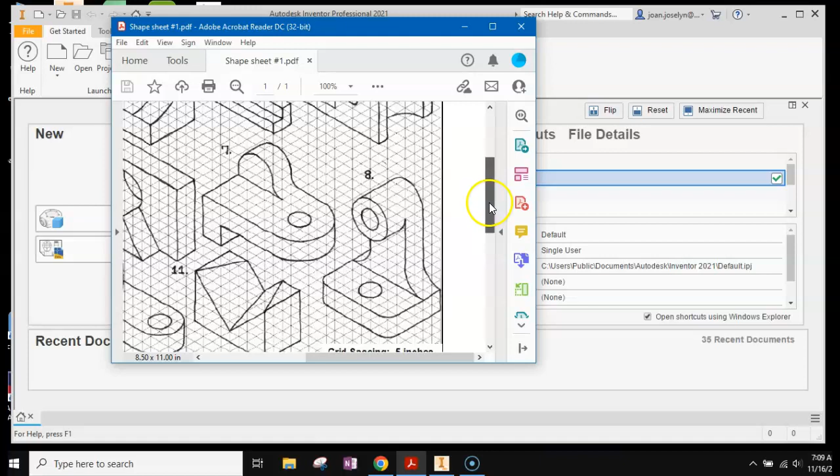Today we're going to look at shape sheet number 1 and shape number 8 right here. The grid spacing, as you can see, is 1/2 inch for every box. I think we'll start off with this base and then we'll build on top of it. So let's see, 1, 2, 3, 4, 5, 6 by 1, 2, 3, 4, 5, 6, 7, 8. 6 by 8. Let's start there.

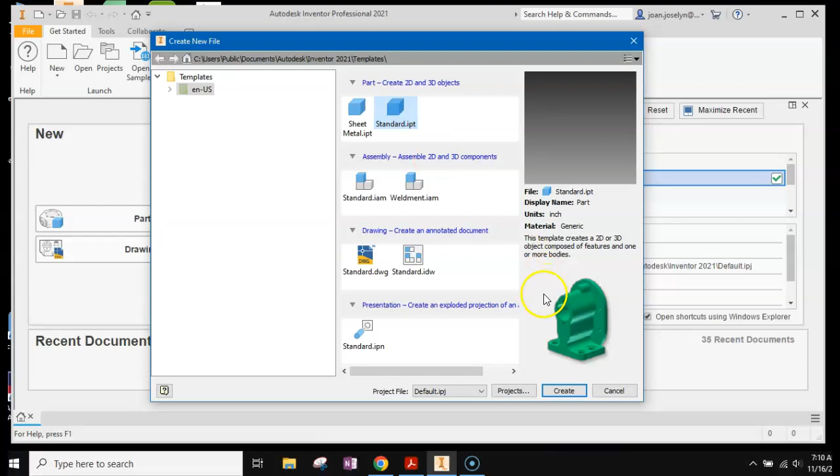All right, I'm using Autodesk Inventor and I'm going to do a new part. If you're coming from here, top where it says new, make sure you're not picking sheet metal. Pick standard, and then come down and hit create. IPT is a part file.

All right, so we're going to pick a new plane for this object. Come up to start new 2D sketch, and let's work on this like top type plane here. See this one here, XZ? Let's work on that. It's going to rotate it a little bit for you, but that's okay.

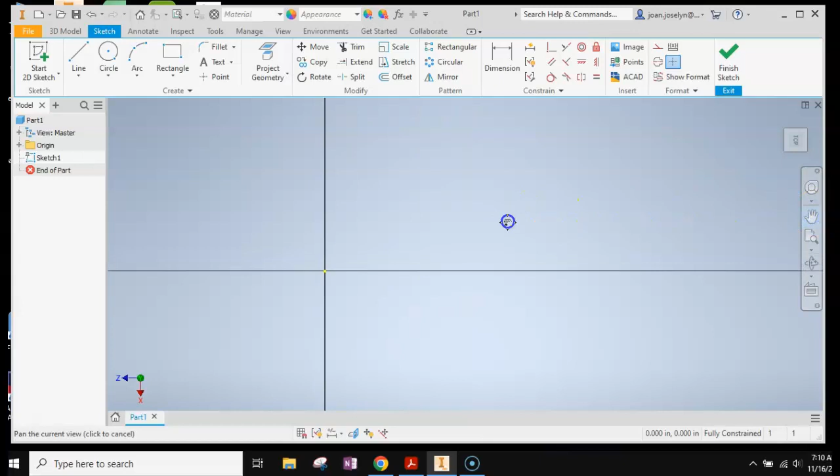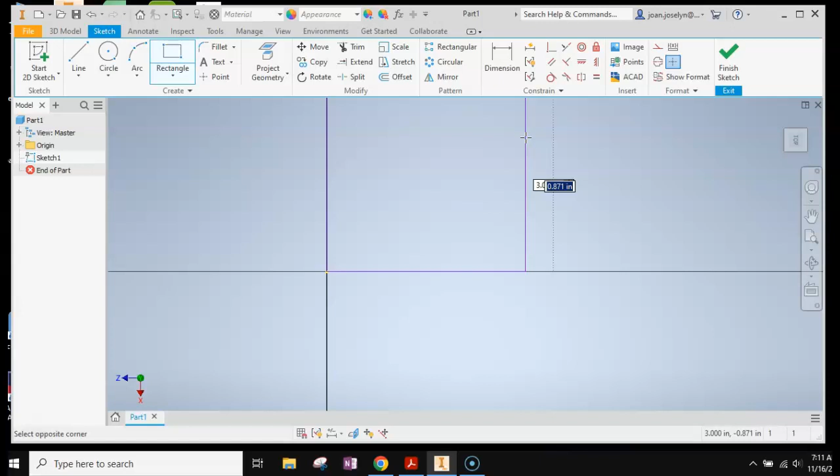Use my pan tool. Okay, we're going to take the rectangle tool. We'll go right on the origin, and we're going to drag to the right. Let's see if I can remember what I just said. The side here was 6 boxes, so that's 3 inches. If I hit tab on my keyboard, I can type in the top part, which was 8 boxes, or 4 inches. And then I'm just going to zoom out to, see if I can do this.

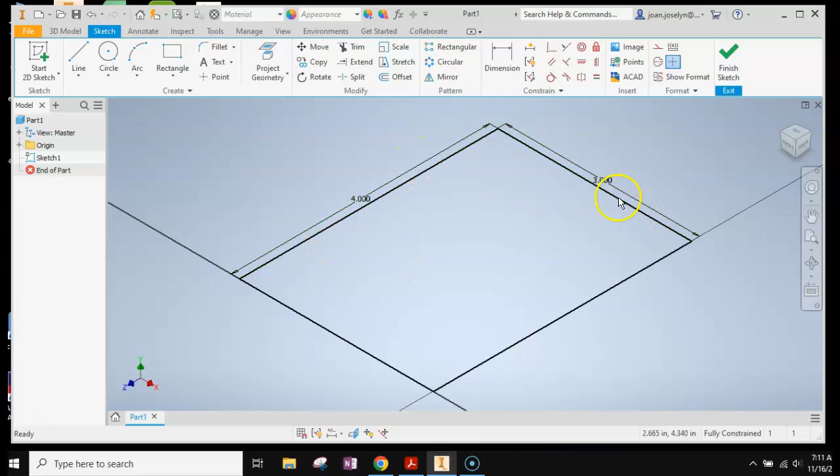I don't have a mouse. I'll hit the house button. Escape. Okay, that'll put it in front of me. I just hit the house so I can get it at 4 by 3, so 8 boxes by 6 boxes. Finish the sketch, hit that house, and then let's extrude it.

It looked like it was just 2 boxes going up, so 1 inch. So 1 inch it is, 2 boxes right there. Good job. All right, let's see what the front view is. Okay, I probably should have rotated this a little bit, but it's okay. We can work with it. Let me go this way.

Okay, so back in isometric, we're going to start building on the top here, and we'll see. So I'm going to be in the opposite direction of this picture, but it's all good. Let's see if we can build this part right on. No, let's do the curve while we're here. We'll do the curve and we'll do the circle. The curve looks like it goes in about 1/4 inch, and then we got the circle right in the center there. The hole we can add there.

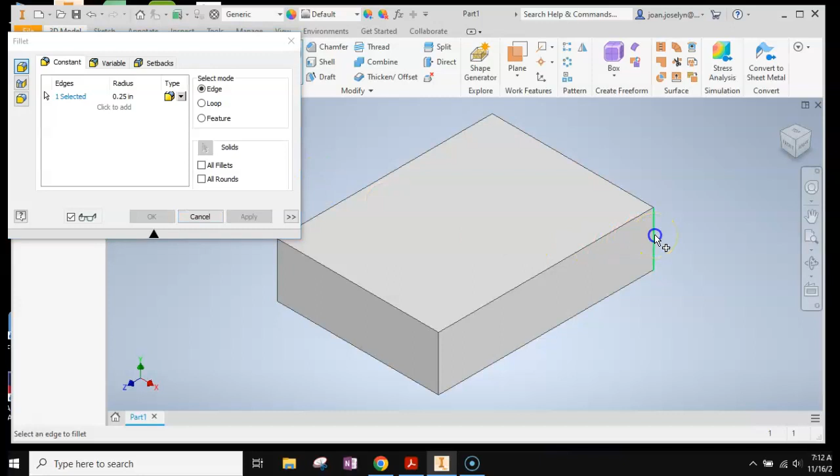Okay, so let's try the fillet tool. We do not need to be in a new sketch this time because we have a body we're going to do it on, and I think it looks like 0.25 inch, but we'll see. We're going to make sure we click on this corner and this corner. Yeah, there you go. And hit apply.

Looks a little thin compared to this picture. Let's take a look. No, because see, it goes halfway through a box. Yeah, that's about right. Okay, so now let's get this hole in here.

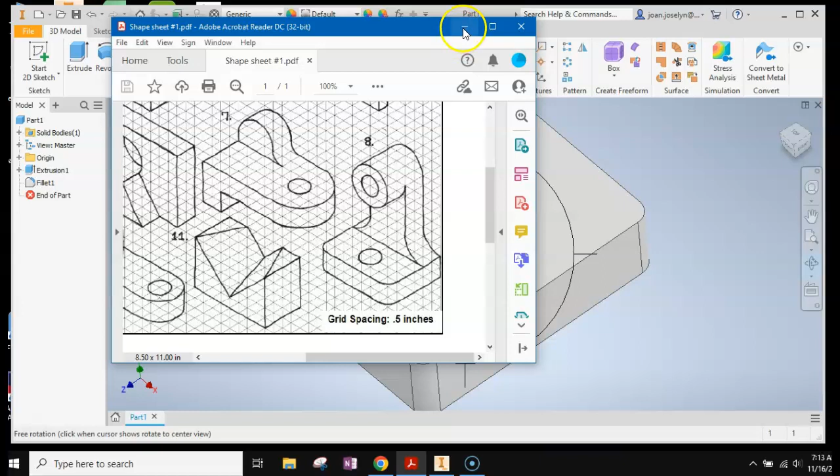It looks like it's, let's see, about 1 inch wide. Yeah, about 1 inch radius here. And then it is 1 inch away from this edge, and 1, 2, 3, 4 boxes, 2 inches away from the other edge. Okay, escape. Let's start a new sketch.

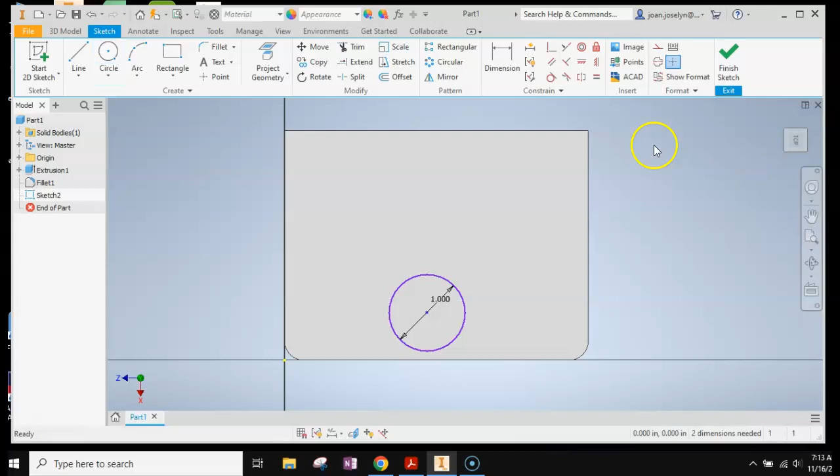Let's put it right on the top face. We're going to use the pan tool to move it over. Circle tool, we're just going to throw it anywhere. Call it 1 inch. You can also use a dimension tool to make it 1 inch. Hit escape on your keyboard. Now we're going to use the dimension tool to place it where we need it. Always start from the center of your circle, not the edge, but the center.

So click, left click center, left click bottom. I'm going to drag to the right a little bit so we can see it better. And I think we said it was 1 inch away from the edge.

Let me just double check that. Yeah, it's 2 boxes in. And then it was 2 inches from the side.

So dimension tool, center, grab one of the edges, left or right, doesn't matter. Just going to move it up so you can see it better and hit 2. Don't need to do the other side because it's a 4 inch square, so we're good. It's right in the center.

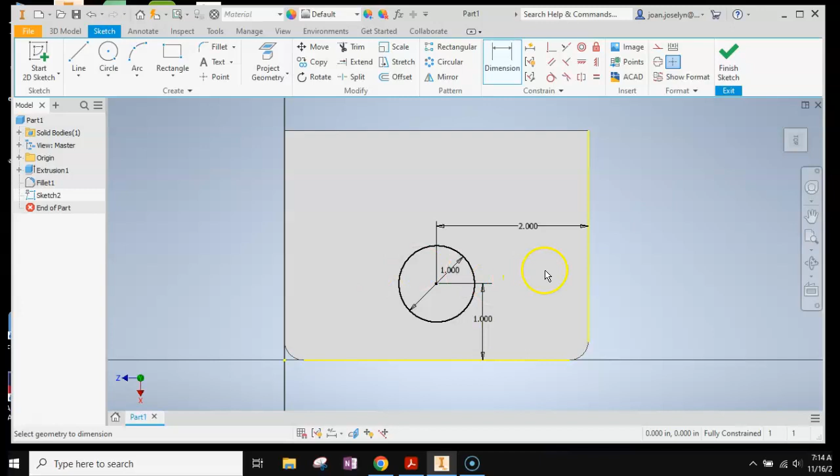Finish your sketch and then extrude. Hit extrude and drag this down all the way through, or hit cut in the Boolean options. Hit OK. There you go. That was pretty easy.

Okay, now for the back. We're gonna see if we can build this part. I'm just gonna build this center part. It's 1, 2, 3, 4 inches wide, and about 1, 2, 3, 4, 5, 6. Oh, that's a brain breaker, isn't it?

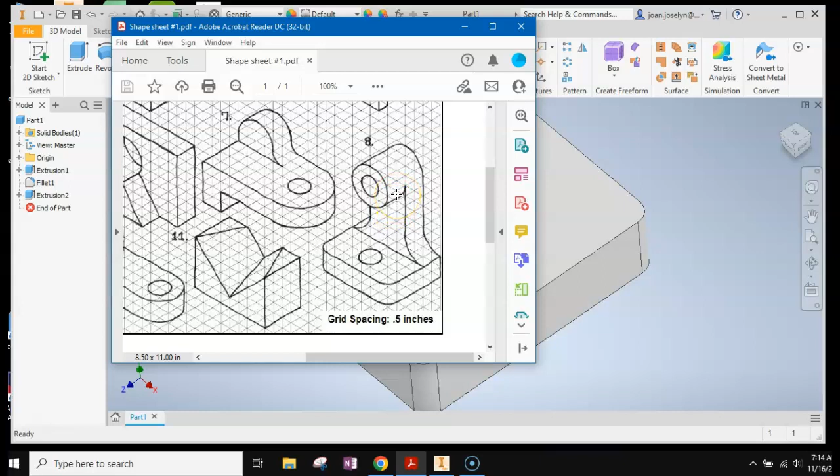Yeah, let me get a little closer. Okay, so 4 wide. That's 2 inches wide. 1, 2, 3, 4, 5. This is where I lose it. 6. I'm trying to get right into here.

1, 2, 3, 4, 5, 6. I think I'm going to go 7. Okay, so let's get this around the back.

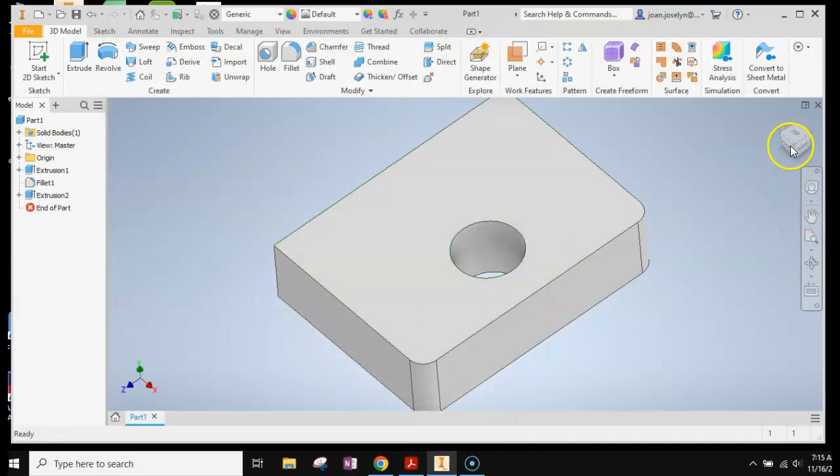You can use your view cube to drag it, or you can click through. I want the back of it. The arrows will help you. And then, okay, so it says, I don't think that's right though.

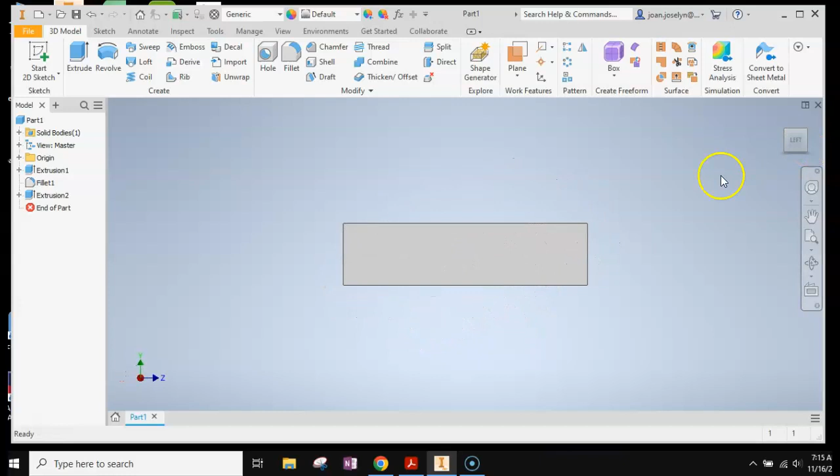Yeah, you have to look at it because it's how we set it up, right? So we're going to go, it's actually the left of it, which we know is the back of the object, but however I put it on the plane, that's how it's coming up.

Okay, so we want to work back here. See how there's no fillets? We're behind it. Okay, so we're going to do a new sketch right here.

And I know I need a rectangle tool. I'm going to go right on this line. It changed color when I got close. Make sure you see that.

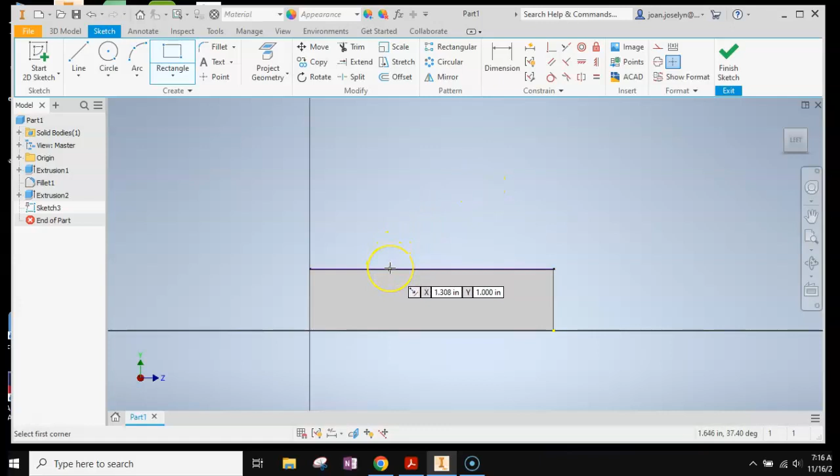Changes color. Going to pull it to the right a little bit. And I think I said it was 4. Hold on. 1, 2, 3, 4. We're going to ignore those curves.

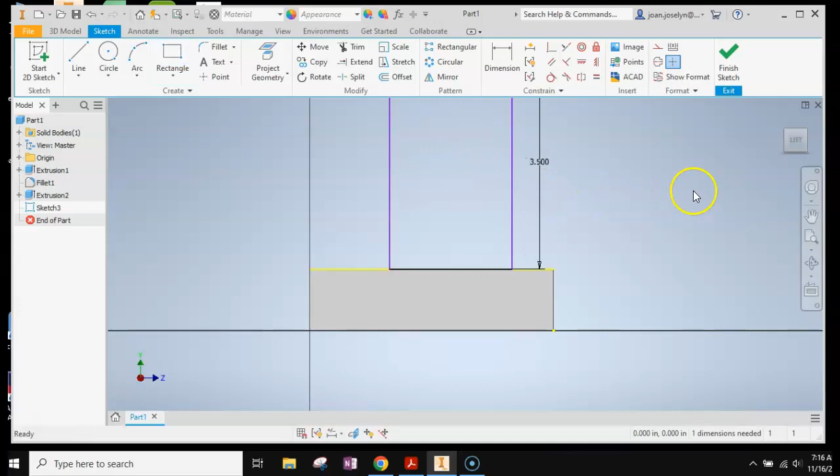We can do a fillet for that later. Okay, so 4, that means 2. And we decided the top was 7, so 3.5. I mean, feel free to disagree. We'll see if I've got it right or not.

Okay, now we need to put it correctly away from the edge. So come over here. Looks like it's 2 on either side. So 1 inch on either side.

Dimension tool. I'm going to touch this edge on the left of my new object and the left side of the solid that we made earlier and make it 1 inch. I'm going to do the same thing on the other side. It should already be there.

I'm going to left click. It says 1, so I'm not going to force a driven dimension. I'm going to hit escape. I am good here.

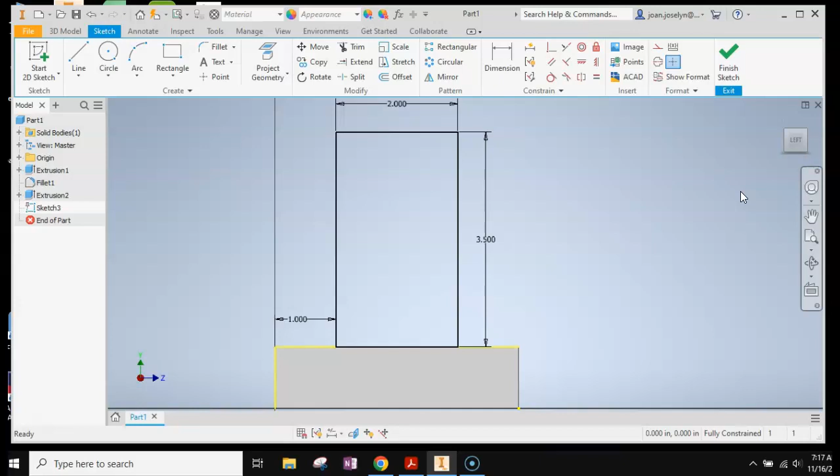Put the circle on now or after. We'll do it after. We could do it right now. Okay, let's hit the house so we get it in front of us. And I'm going to say it goes out 1 inch right here.

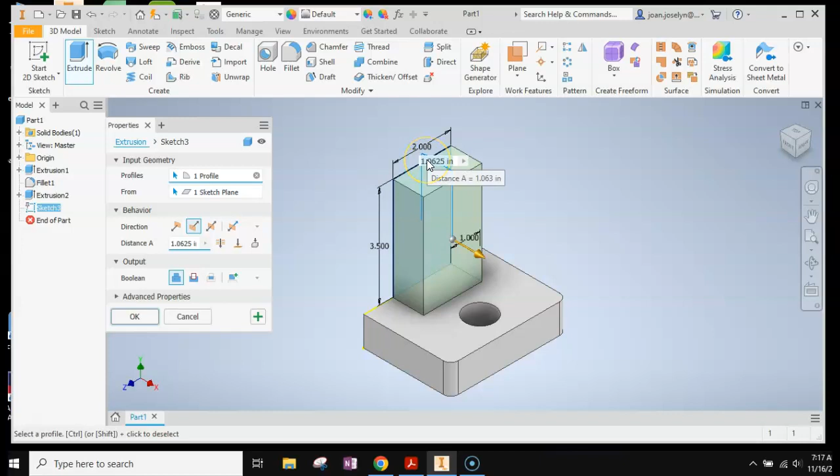So extrude, and we want to go in the other direction, and it is 1. So type in 1, enter. Make sure you're not on cut and you're getting actual material. Okay, this is looking good.

Let's use the fillet tool. I think 0.25 is what we're going with here. We're going to click that side and the other side. You can either rotate it around or just very carefully get in there. See that?

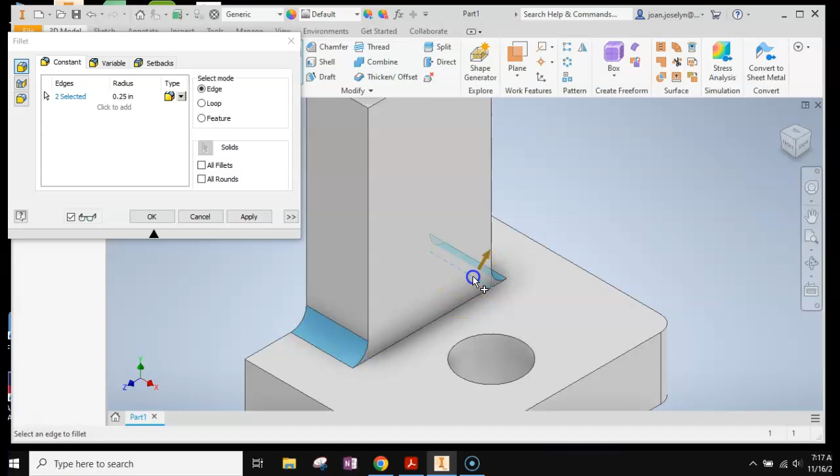How it just kind of shows up? Yeah, get in there, I think it's 0.25. Oh no, it goes all the way to the edge. Let's fix that. I think you can drag it, yeah, right to the edge. Oh, that looks actually really cool. Apply and cancel. Hit the house.

Yeah, I guess there was a numerical value there. You can go back and pause the video, or you can just double click this fillet. Right click, let's see, edit the feature. It was 1. Okay, so make sure you have that in there.

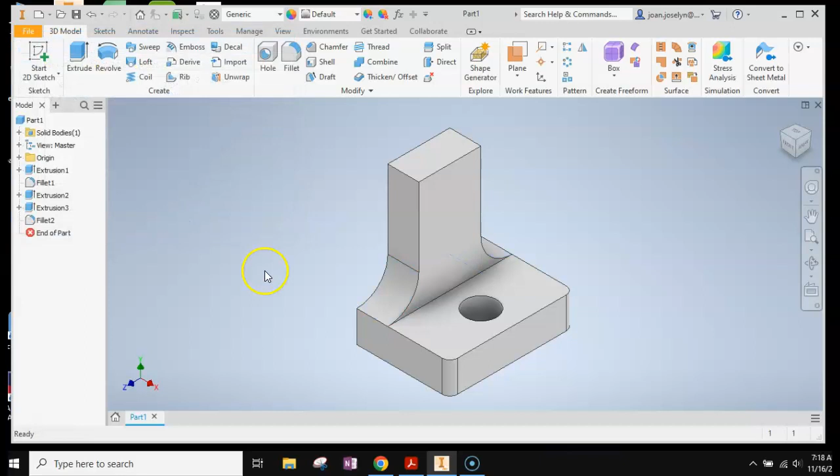Okay, so now let's get around the back and put this circle on it. You could do it from the front, but since it's going forward and back, I thought just go from the back and push it all forward. Less asymmetric work there. So rotate it around, rotate tool.

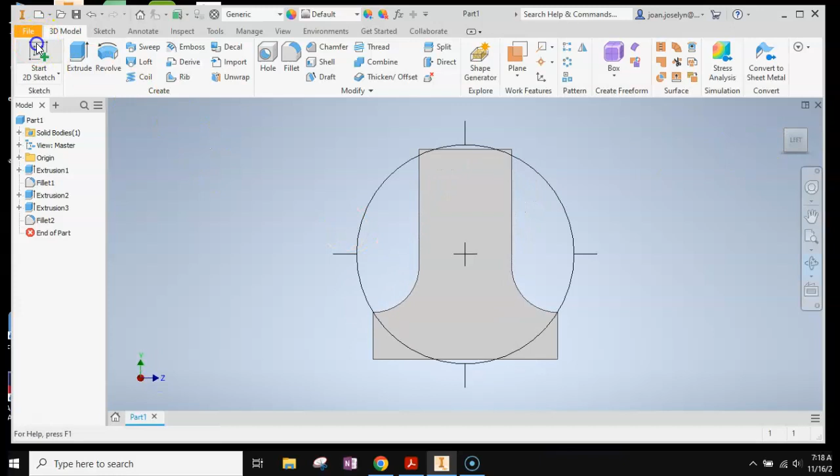And I'm just going to hit this so I get it straight. New sketch, put it around the back. So that new sketch means you can work anywhere on this plane, like anywhere on this plane, which is pretty neat. Circle tool. I think if we get a little close, let's see if I get this a little closer, you can go like right on the center.

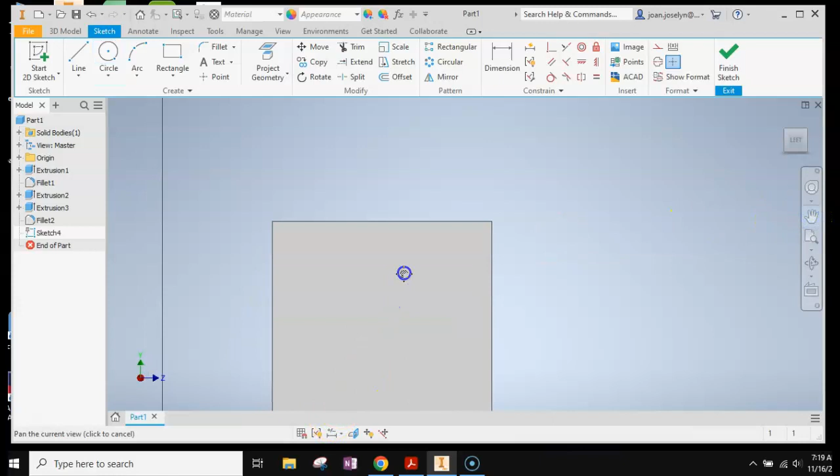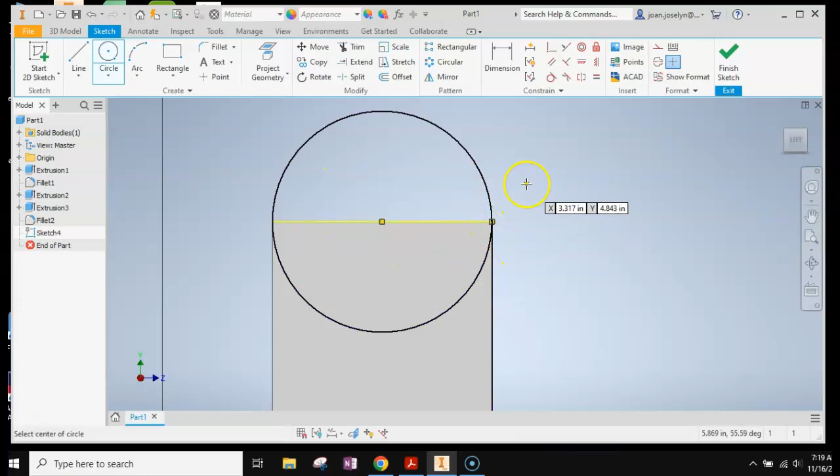See that? Let me do the pan tool, bring it up a little bit. So, circle tool, and if you hover, you'll see there's a dot that pops up when you're in the center. Let's get that. I think we need to go all the way to the edge. Just going to check that picture one more time. Oh yeah, this goes all the way across. Just go all the way to the edge, and then you'll have the right diameter because you went to the edge. So you're already good there, and you can just close your sketch.

Let's hit the house button, get it back in front of us. Oh, we need a second circle, don't we? Because there's a hole on there. Probably do this at the same time, or do it after. Either way, let's see how far it goes. So 1, 2, 2 inches, 1 inch here, 1 inch there.

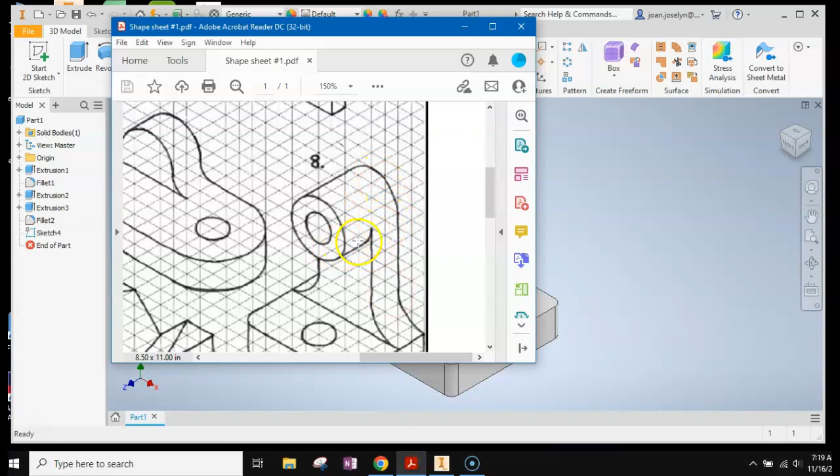And we're going to extrude, and we're going to select, oh, we're going to need to see both, right? So we'll turn around and get to the back here. Escape. We need this and this. We need it to go in the other direction, right?

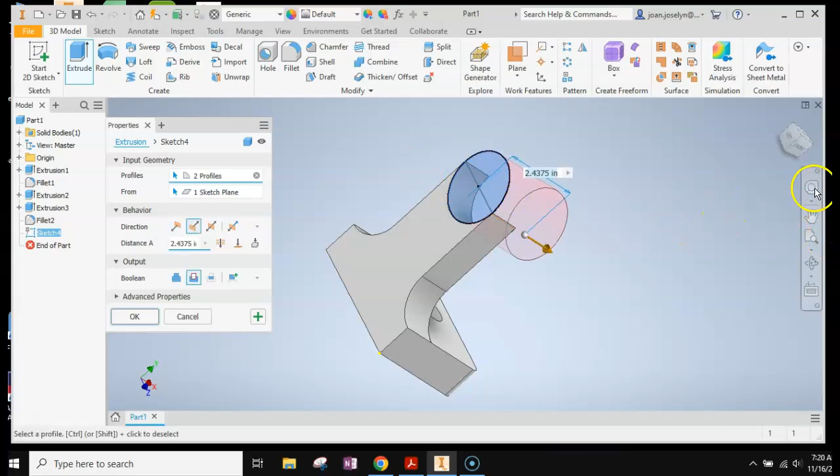So let me hit this house button. Now that I've got both selected, that's going to cut it out. We don't want that. So we're going to come over to Boolean and put join. And then we make sure it's 2 inches. There you go. Okay, new sketch.

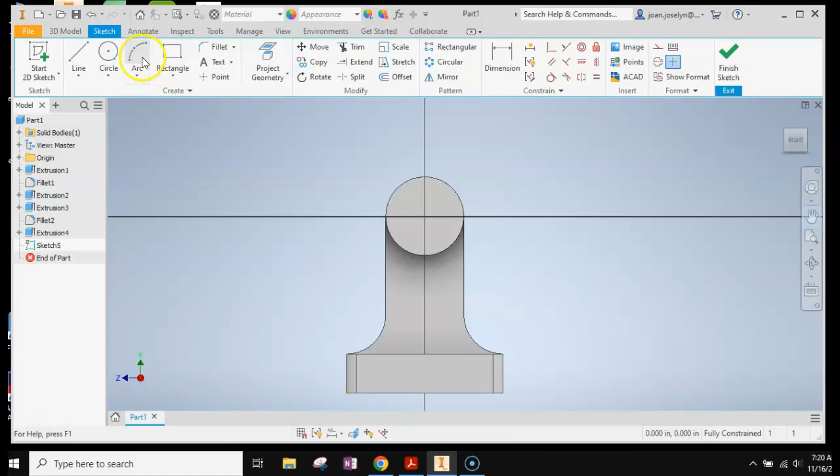And yes, you could have done this on the last sketch. Put that little circle right in the middle. I just missed it. Circle tool right in the center. I guess I should see how big it is. I'll bet it's 1. Let's do that and hit enter, and let's just double check. Yeah, because it's 2 boxes wide.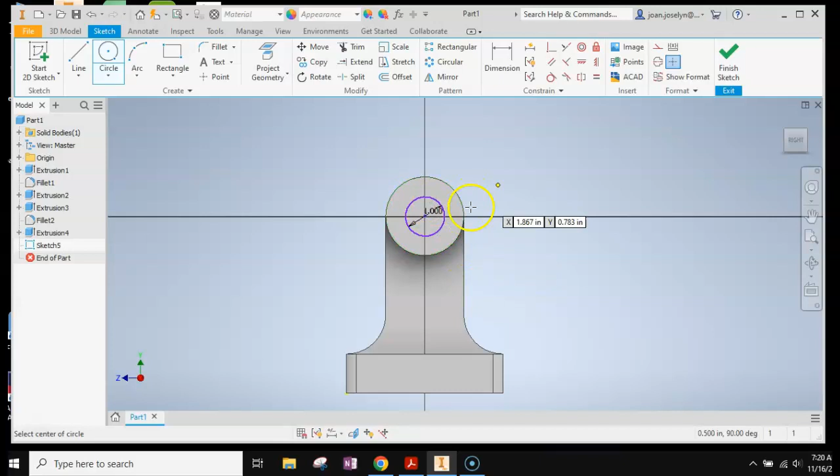And does it go all the way through? Good question. Doesn't say, it's not a schematic. You can put it all the way through or not, that'll be entirely up to you. Finish your sketch. Extrude. We know that it's a cut, right? So we can go this way. I'm going to cut mine all the way through because it looks cool. And then hit OK. All right, so I'm in the wrong orientation compared to that picture, but I did make

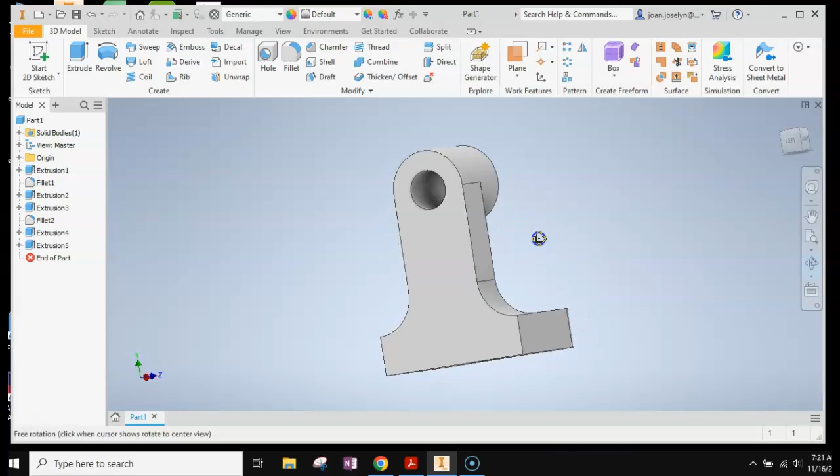the part. If I 3D printed it, it is exactly the same. So that's pretty neat. Thanks for playing. And just a word on 3D printing: if you 3D print it, you won't actually see these lines. The 3D printer knows to make them softer, and they do not show at all. It's pretty cool, so try that if you can.